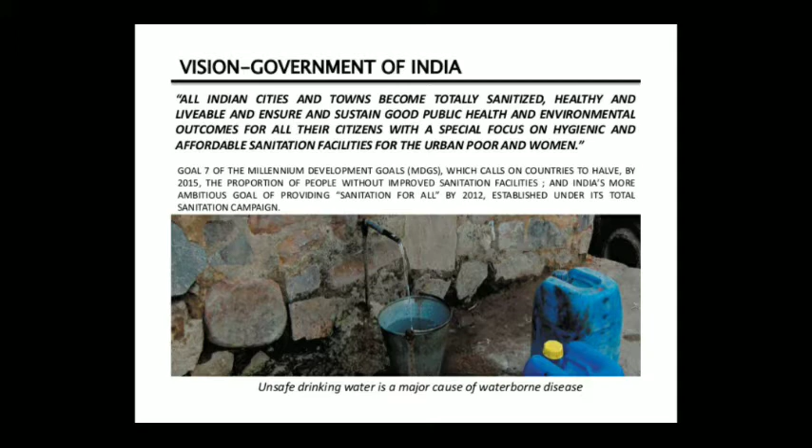According to research, 1.8 billion people use a source of drinking water contaminated with feces. The combination of inadequate sanitation, poor hygiene, and unsafe drinking water results in an estimated annual burden of 2 million diarrhoeal deaths. Source is WHO UNICEF 2014. Our Indian government has a vision: all Indian cities and towns become totally sanitized.

Good economic investment: as a result of practicing good sanitation your family saves money on healthcare treatment. The steps in the process of sanitation are: first, user interface, a household latrine or public latrine; collection in sanitary pits or septic tanks; conveyance through the sewer system and vacuum suction tanks; treatment through appropriate technology; and disposal and reuse through the appropriate means.

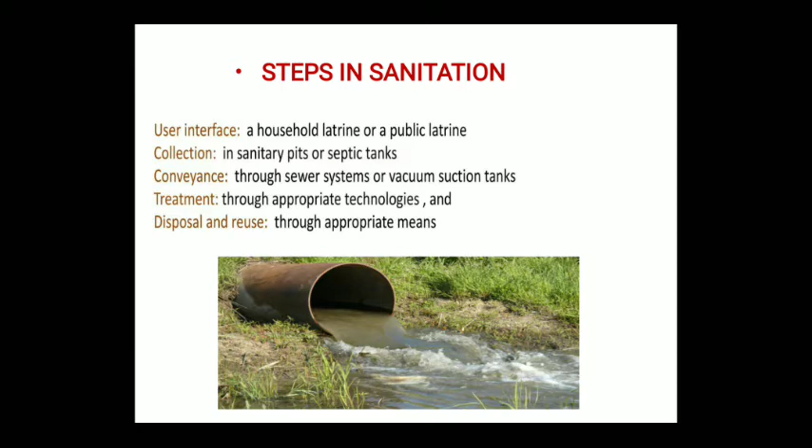And the project on Chatarpura village. About Chatarpura, this village is established near Jaipur city. According to the 2001 census of India, the location code and village code of Chatarpura village is 080098. Chatarpura village is located in Sanganer Tehsil of Jaipur district in Rajasthan, India, situated 20 km away from sub-district headquarters Sanganer and 22 km away from district headquarters Jaipur.

As per 2009 stats, Bahapura is the Gram Panchayat of Chatarpura village. The total geographic area of the village is 354.84 hectare, the total population is about 408 people and total houses is about 72. And this is the Google map of Chatarpura village. We calculated that the discharge of Chatarpura village is about 20000 liter per day, the slope is toward the southwest, and drainage is an open ditch system.

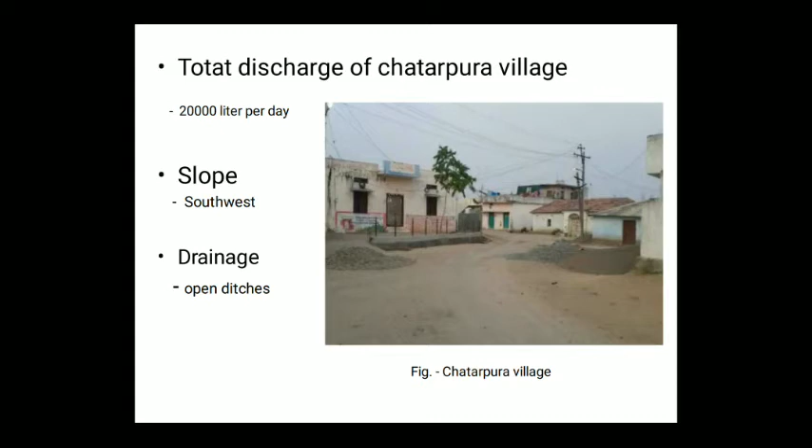Now we understand about wastewater. Wastewater is water that has already been used. It is any water whose quality has been adversely compromised by anthropogenic influence. It can originate from a combination of domestic, industrial, commercial, agricultural activities, surface runoff or stormwater, and sewer inflow or infiltration. In advanced countries, municipal wastewater, also called sewage, is usually conveyed in a combined sewer or sanitary sewer and treated at a wastewater treatment plant. Treated wastewater is subsequently discharged into a receiving water storage tank via a discharge pipe.

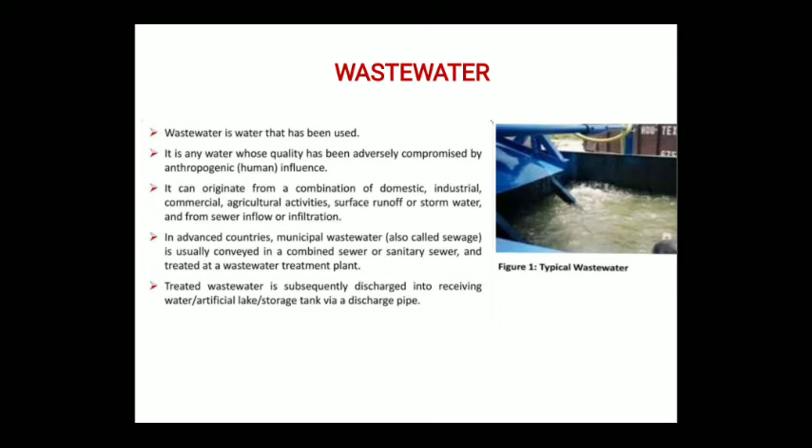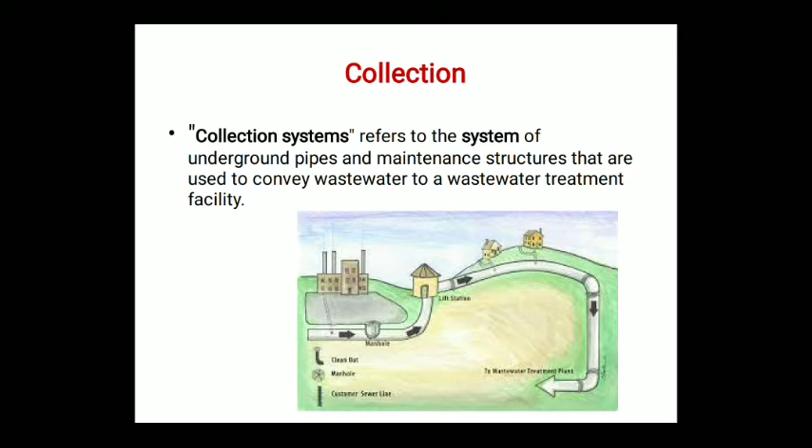Steps of treatment of wastewater: collection, screening and straining, sedimentation, and oxidation pond. Collection system refers to the system of underground pipes and maintenance structures used to convey wastewater to the wastewater treatment facility. Next, the screening process. Screening is the first unit operation used in a wastewater treatment plant. Screening removes materials like rags, paper, plastic, which drain out from our sewer pipe, before entering the sedimentation tank.

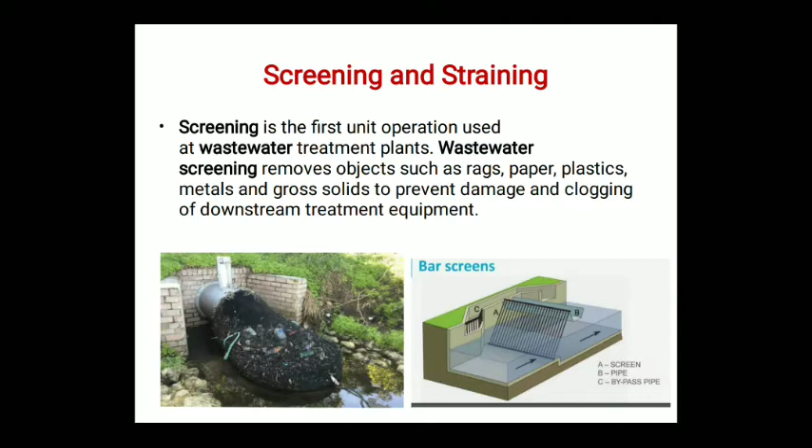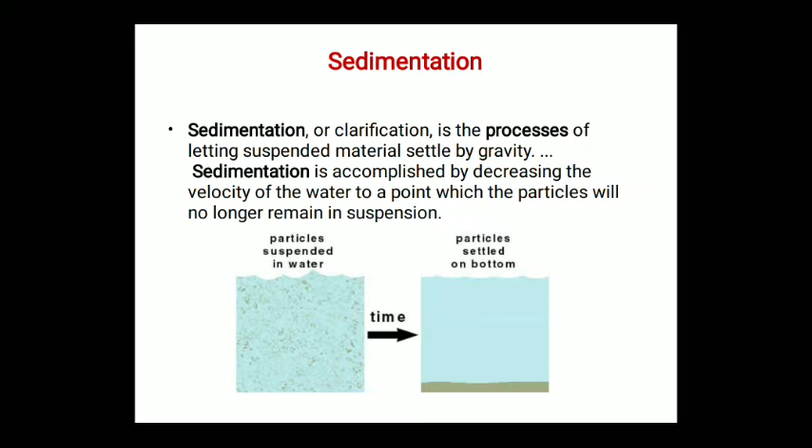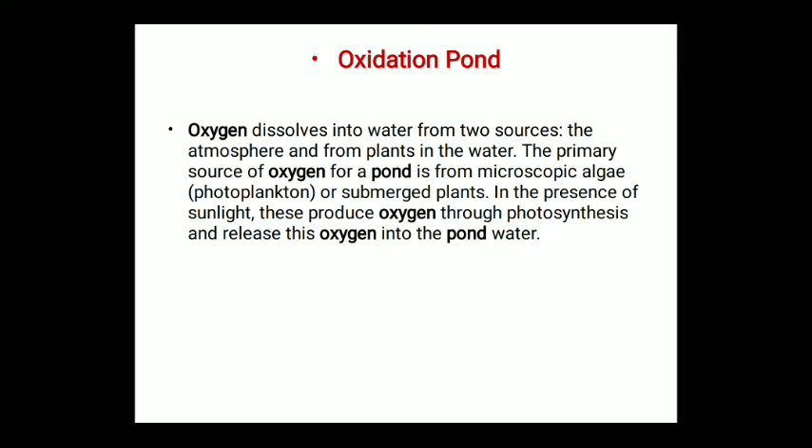Sedimentation is the process of letting suspended material settle by gravity, reducing the velocity of water to a point where a particle will no longer remain in suspension. Oxidation pond. Oxygen dissolves into wastewater from two sources: the atmosphere and plants in the water. The primary source of oxygen for a pond is microscopic algae or submerged plants. In the presence of sunlight, these produce oxygen through photosynthesis and release it into the pond water.

Design of oxidation pond. We designed this pond for our village Chatarpura, and the population is taken as about 1000, increased because many times surface runoff and storm water are also included in it. That's why we increased it, and future population is also included. Sewage we take about 50 liter per capita per day. Organic loading rate is about 200 kg per hectare per day. BOD about 300 ppm, and length to width is about 2:1.

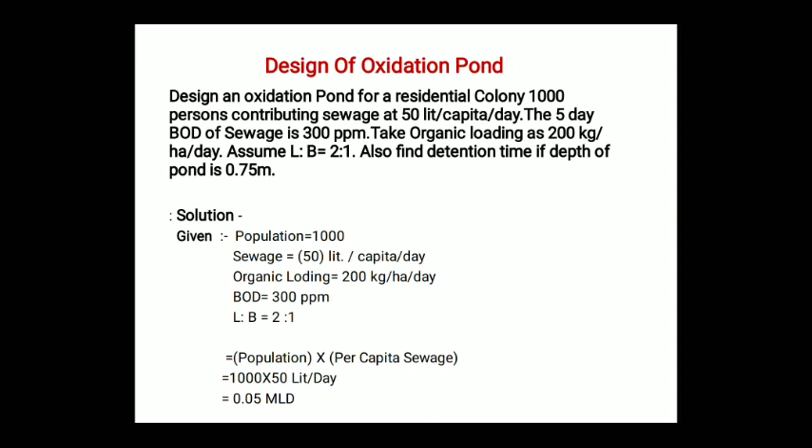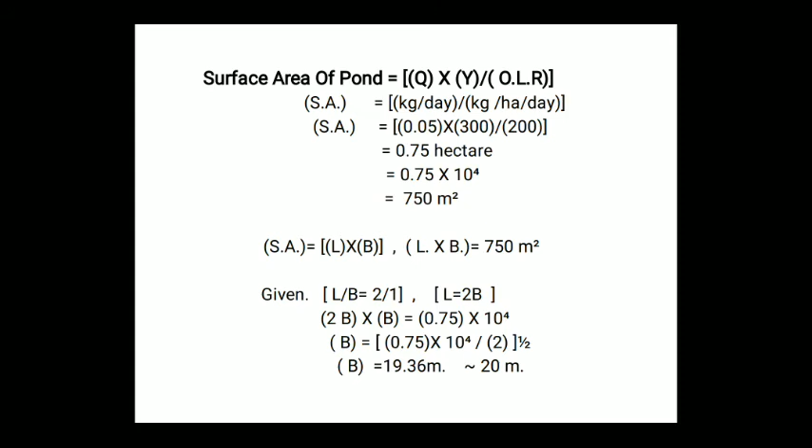Population times per capita sewage is about 0.05 MLD, and the surface area of the pond is about 750 square meters. Then length and width are calculated from this surface area: width is about 20 meter and length is about 40 meter. Now we calculated the detention time with the help of the volume and discharge, and it comes out to 11 days.

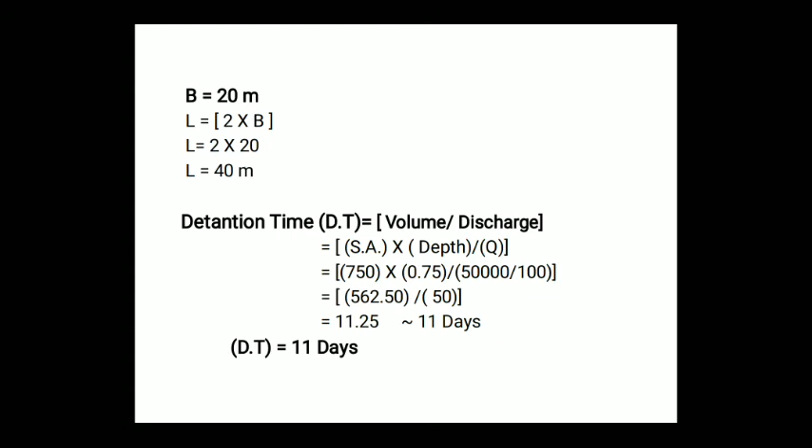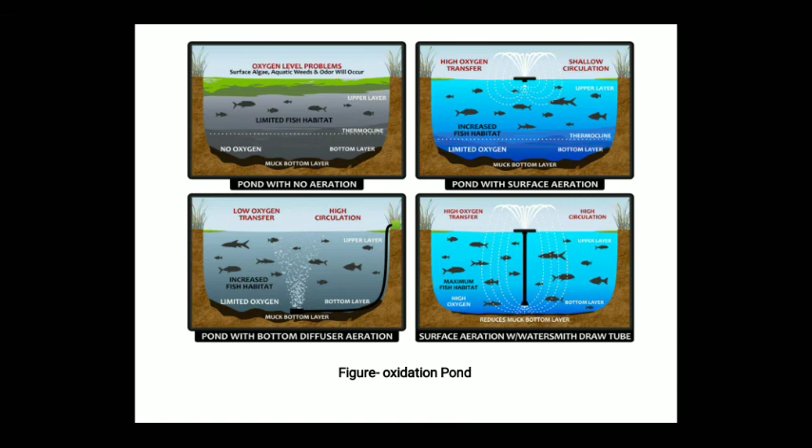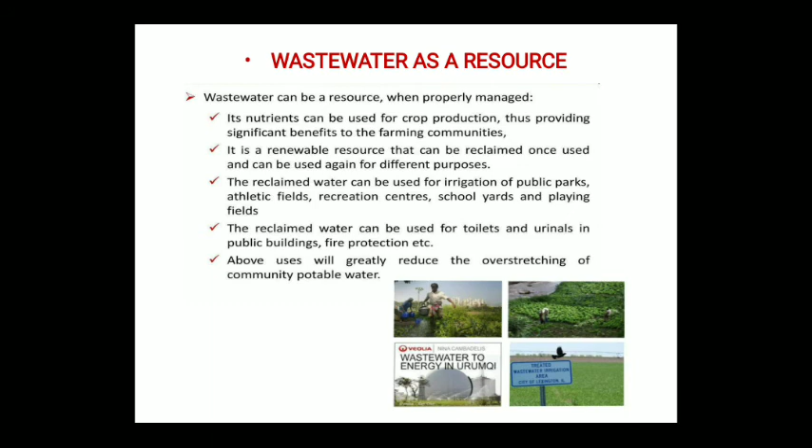Wastewater as a resource. Wastewater can be used; mainly its nutrients can be used for crop production, thus providing significant benefit to farming communities. Conclusion: we need to improve wastewater management at the heart of the rural economy. The benefits are wide ranging, including energy security and climate change impact mitigation. That's why it helps if the government intervenes in this, and it helps in lots of areas in the agriculture field.

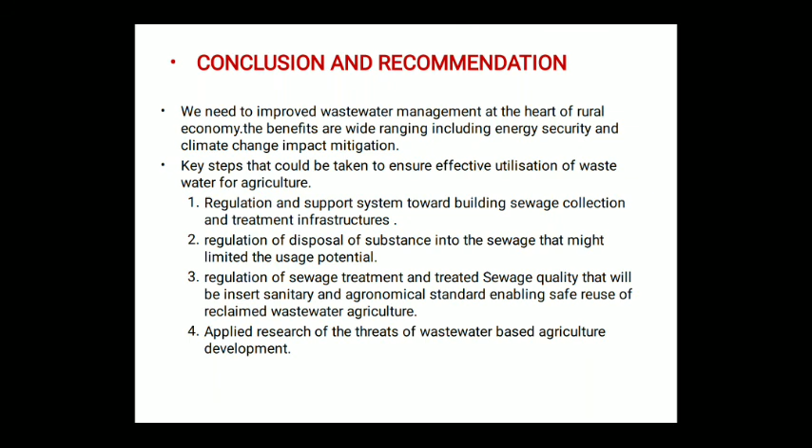Regulation and support systems toward building sewage collection should be made by government. Regulation of sewage disposal that might limit its use potential. Regulation of sewage treatment and treated sewage quality that will help with agronomic standards and reclaimed wastewater agriculture reuse, and also help improve the quality of our rivers. Applied research for wastewater based agriculture development.